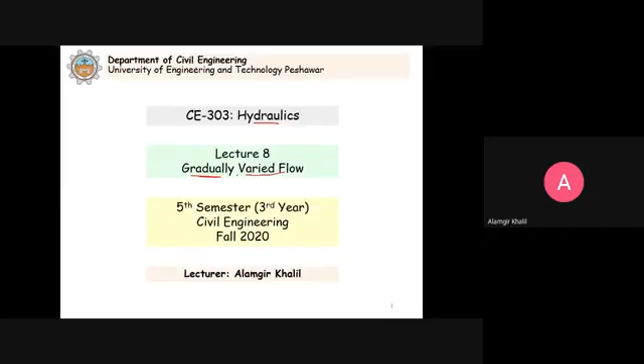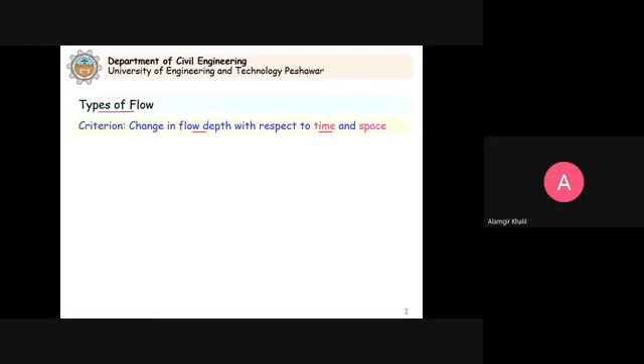The different types of flow that we have studied, the criteria being flow depth with respect to time and space. Open channel flow can be classified as steady flow, where the depth of water is constant with respect to time, not changing: partial y by partial t equals 0. If the depth is changing with respect to time, then we have unsteady flow. All the problems we discuss in this chapter are essentially steady flow problems, meaning the depth and discharge are not going to change with respect to time.

If we base the classification on space, that is with respect to distance, then open channel flow can be classified as uniform flow, where the depth is constant with respect to x, so the change in depth with respect to x is equal to 0. If the depth is changing with respect to x, then we call it non-uniform flow, or commonly in open channel hydraulics, varied flow.

So the flow is steady, and then it can be uniform flow or varied flow. The uniform flow we have already covered so far. This varied flow, when the depth is changing with respect to x, can be further classified into gradually varied flow and rapidly varied flow. In this lecture and the coming lecture, we will cover these two topics.

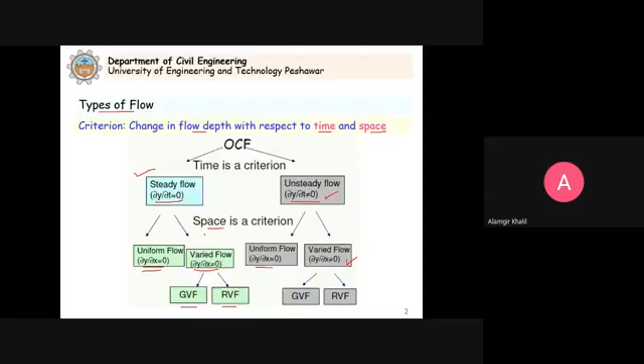Now, obstructions cause the flow depth to vary. When we have flow in an open channel, it will try to flow with one depth. If the flow conditions and channel cross sections do not change, essentially what will happen is that we will observe the flow in the open channel as uniform flow.

But in the flow there can be obstructions. For example, in this figure, the bottom of the channel is at one slope, but here the ground surface changes, and you can see the ground surface is now at this elevation or at this slope. So definitely we have to provide here a drop structure.

Similarly, for example, on rivers, we have to construct barrages, dams, weirs, and other hydraulic structures. Essentially what we are doing is bringing changes in the flow conditions, and generally we say that obstructions cause the flow depth to vary. So the flow will continue to be uniform flow as long as there are no changes.

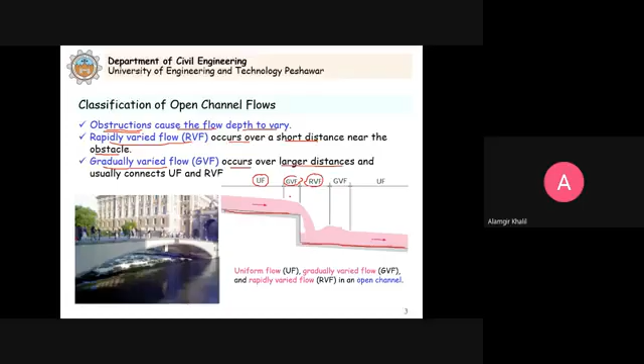So now essentially we should learn how we will analyze the open channel flows when we have varied conditions for the depth. So now we know that we have uniform flow. What is the reason for that? And what are the different types of flows that can occur with changing depth?

So in this figure again, you can see here that a gate is provided here. This is a gate to release a controlled supply of water, and these are all practical applications. So you can see here that just downstream of this gate, we are assuming that the depth varies abruptly. So this can be a rapidly varied flow. Then in the channel, a uniform flow will establish.

But you can see here that at the downstream, we have another hydraulic structure. This can be in the form of a weir, notch. So you can see here that we have the damming action. The water level rises upstream. And in this situation, you can see that there is a break in the water surface, which is shown by this curved or zigzag line.

Now downstream of this, we have this drop structure. And also you can see that the slope is changing. So when the slope changes, so you can see here again, the depth cannot be constant at all sections.

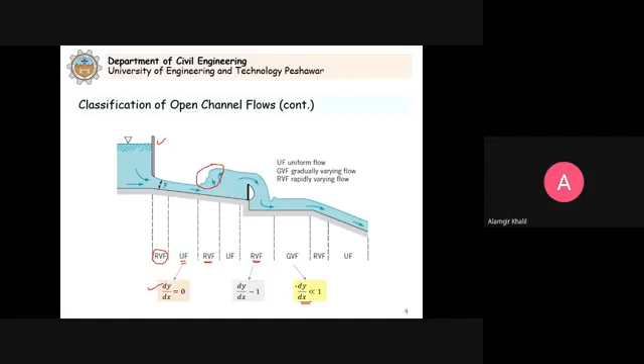If we compare this with the gradually varied flow, the change in depth with respect to distance is very small. It is changing, not equal to zero. For uniform flow it is zero, but here it is very small. When this condition is satisfied, we classify the varied flow as gradually varied flow. But as the change in depth increases, for rapidly varied flow, dy by dx is approximately 1.

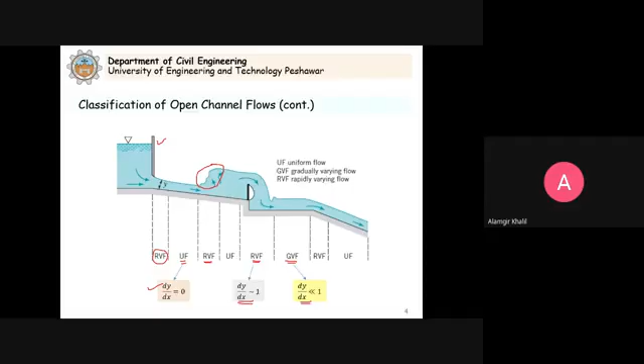Now, in today's lecture, we will cover the gradually varied flow problems. So why do we need to study gradually varied flow? You can see in this figure, we have a channel or a river or a stream.

So the water will flow with normal depth. And we defined earlier what is normal depth: it is the depth corresponding to the normal flow. And what is the normal flow? That is the uniform flow. Clear?

If we do not have any obstruction, this water will continue to flow with the normal depth, as shown by this dash line. So this water will continue to flow like this. Since now we have constructed a hydraulic structure in the form of a dam, we can call it a dam.

So what will happen is that the dam will store the water behind it, and this artificial lake created behind the dam, on the upstream side, we call it the reservoir. So because of this hydraulic structure, the water level has increased. Initially the water level was here, but now because of the dam, this water level has increased up to this level.

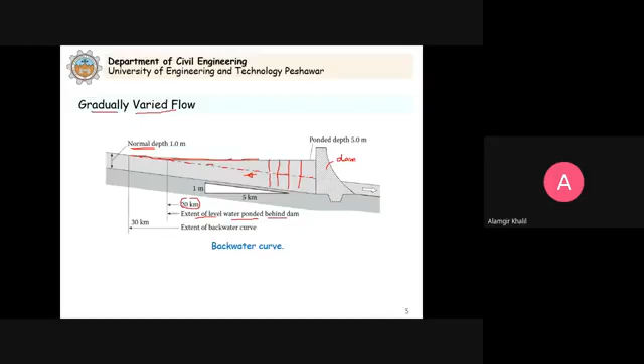And this curve which results here, the top surface curve, forms as a result of impounding this water. So this extension of the backwater curve is up to 30 kilometers upstream. It means that when we construct the dam, the effect of this curve, which we call the backwater curve, is generated because the water is backed up behind the dam, and the curve formed as a result of increasing the depth of water is the backwater curve.

So the effect of the backwater curve means that the increase in depth upstream has traveled 30 kilometers. This is not a short distance. Why are we interested to know about this?

Because the channel carries water at a certain depth, but because of the dam, the water level has increased. So what will be the problem? If this channel does not have sufficient capacity to carry the water, it will overflow.

For example, we have this channel here and the water flows in it. This is designed for uniform flow condition. But now as a result of the dam, the water level will rise. So if this channel has no capacity, this water will overflow its banks, it will overflow the sides.

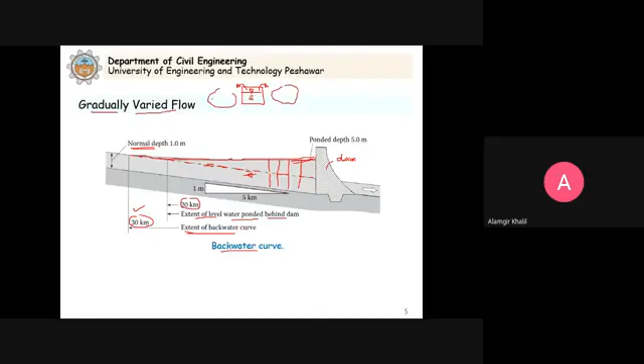And what will happen is that on this side, the communities will be flooded. So why is it important? This effect can be important for river engineers who wish to ensure that a river's embankments are high enough to contain flows, and for landowners along a river whose land may be flooded by the dam construction.

So we have to ensure that the river embankments are high enough to contain these flows. And for landowners along the river, those living along it, their land may be flooded because of this dam construction. And this actually happened.

In the case of the Tarbela Dam, the largest earth and rockfill dam in the world, when we constructed this dam, behind it we have a large reservoir and the water level increased. So several villages and people had to be relocated to other areas. So essentially this backwater curve, which results because of the construction of the dam, is essentially a problem of gradually varied flow.

This shows the importance of why we need to study the gradually varied flow topic. Now we know that this gradually varied flow is an important topic. Now we need to see how we develop the basic theory and then how we analyze the gradually varied flow problems.

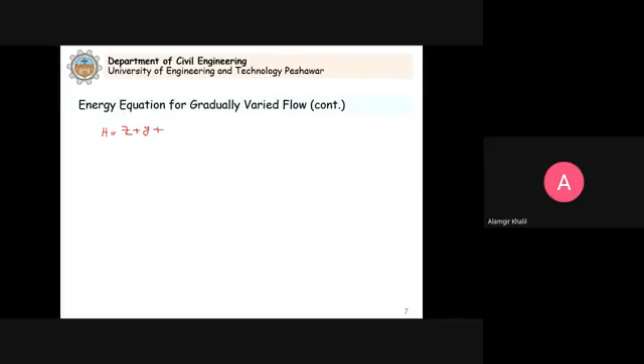So what we do is learn that the total energy can be written as H equal to Z plus Y. This is the potential energy head, because we are expressing energy per unit weight, so it is head. So we have Z plus the depth of flow Y, plus alpha V square by 2g, the kinetic energy head. Now in these problems, remember Z plus Y is the potential energy head above the arbitrary datum, and alpha V square by 2g is the kinetic energy head. This V is the mean velocity, the average velocity in the section.

Now, this alpha, the kinetic energy factor, is higher in open channels than in pipes. As you studied in chapter 8, it may range from 1.05 to 1.40 for open channels. And in case of a channel with obstruction, this alpha just upstream may be as high as 2, or even above 2.

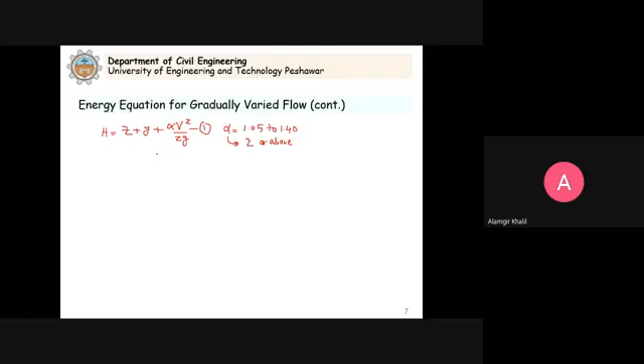Clear? Now this energy equation that we have written, let's say this is equation number 1. We will consider this energy equation for steady flow, because all the problems we study in this chapter are steady flow problems. Now between section 1 and 2, as you saw in the previous slide, we have section 1 and we have section 2.

That are delta x apart. What is the horizontal distance between that we consider? These are delta x apart, the two sections. It means the distance between the two is delta x. So now we can write down the energy equation.

What will that be? Z1 plus Y1 plus alpha 1 V1 square divided by 2G. This is equal to Z2 at the second section plus Y2 plus alpha 2 into V2 square divided by 2G, plus HF. We consider the head loss due to the friction. So let's say this is equation number 2.

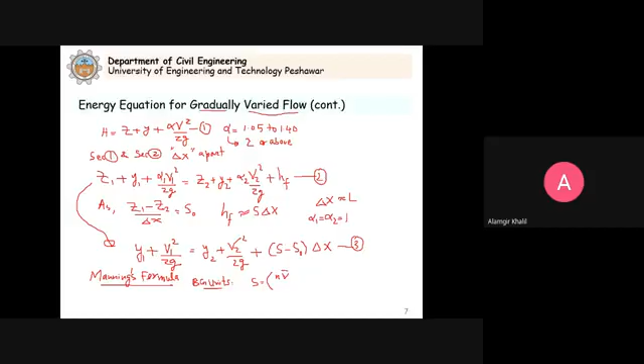In the British gravitational units, we can write down this formula for the slope of the energy line. If you simplify that, this S, the slope of the energy line, will be equal to the Manning's N, the Manning's roughness coefficient, with velocity V bar divided by 1.486 times the hydraulic radius bar to the power of 2/3, and because it is the slope we calculate, we take it as the square. This is in the British gravitational system.

When we consider the SI units, we drop this factor 1.486, and the rest of the formula remains the same. So S will be equal to N times V bar divided by the hydraulic radius bar to the power 2/3, this whole squared.

Now what we mean by V bar and RH bar: because we are considering average conditions, the velocity is not the same at the two sections. So V bar equals V1 plus V2 divided by 2. And this hydraulic radius RH bar equals RH1 plus RH2 divided by 2, since the depth and velocity are not the same at the two sections in varied flow. So we apply Manning's formula to average conditions in each reach to provide an estimate of the value of S.

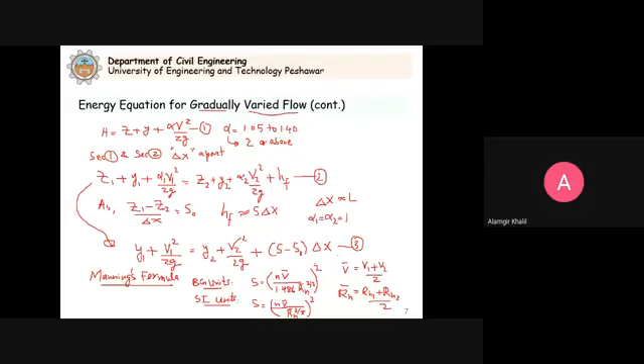Now with this value of S, with S naught and the Manning's N known, and with the depth and velocity at both ends of the reach known, we can compute this delta X. From that equation, delta X will be equal to Y1 plus V1 squared by 2G, minus Y2 plus V2 squared by 2G, this whole divided by S minus S naught.

We will need this equation towards the end of the analysis, this is very important. This will be equal to E1 minus E2, this is the specific energy, Y1 plus V1 squared by 2G. So E1 minus E2 divided by S minus S naught. This was equation number 3, and let's say this is equation number 4.

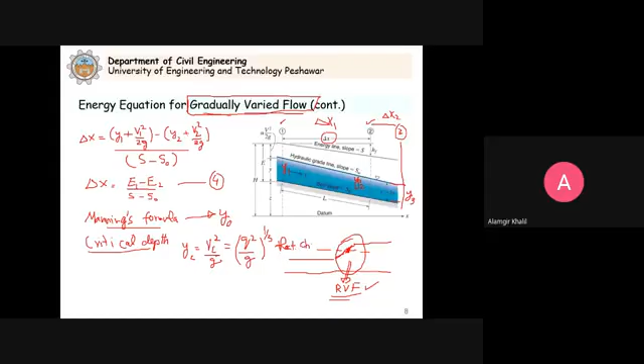You can easily calculate YC. Or if we have a non-rectangular channel, which we already studied, then you can calculate it from the formula for total discharge, which is also applicable to rectangular channels: Q square by G equal to A cube divided by the top width, and this is for Y equal to YC, the critical depth. So for non-rectangular channels you calculate the critical depth from this equation, and then you compare the depth ranges you consider in the problem against Y0 and YC, because we have to make sure that your depth ranges should not cross YC. If it crosses YC, it essentially becomes a problem of rapidly varied flow. Then we have to develop another theory for how to analyze rapidly varied flow problems, because it is no longer gradually varied flow. So this is important, how you write down the energy equation in case of gradually varied flow problems.

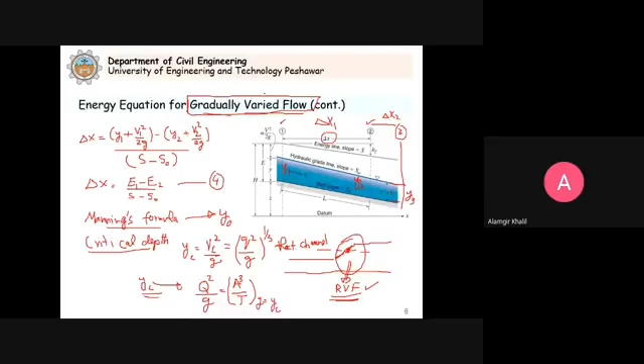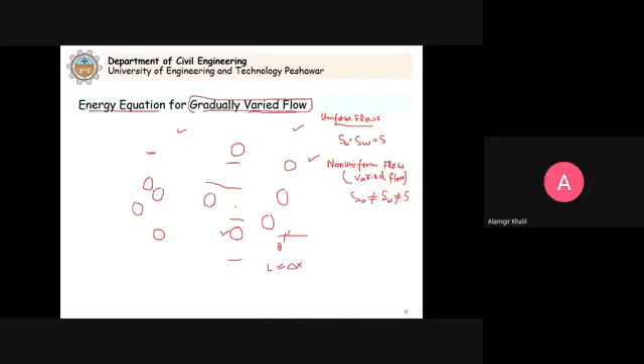Now, before we discuss how we analyze the water surface problems or water surface profiles in gradually varied flow, as you saw here, for example this backwater curve - so how do you analyze this water surface? Because this will tell you how much the water level is increased along this channel because of the construction of this dam. Ultimately, this is what we want to find out.

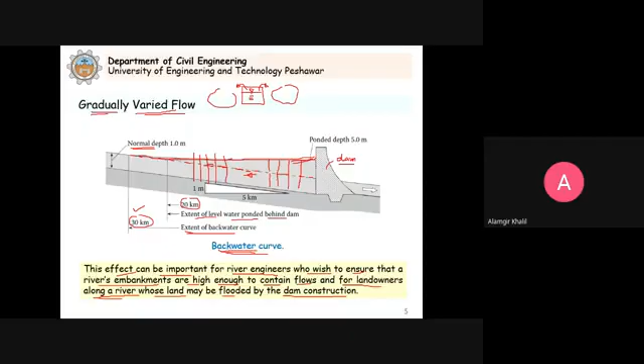So before we do that, we have to study the energy equation, and before that we need to classify the channels, because we have mild channels, steep channels, and critical channels where we have critical flow. So first we need to know the different types of channels or slopes, and then we can develop an equation to help us analyze the gradually varied flow problems. So first we study classification of channels for gradually varied flow problems.

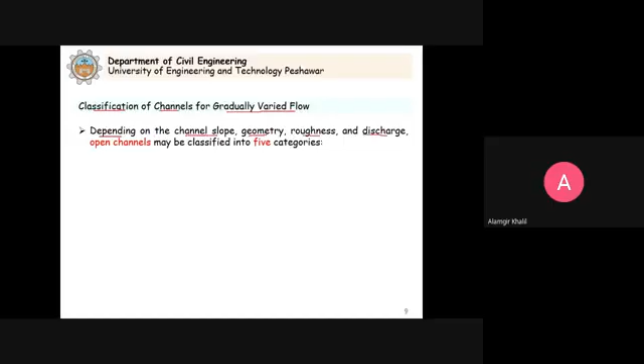Depending on the channel slope, geometry, roughness, and discharge, open channels may be classified into 5 categories. Open channels are classified as being mild, steep, critical, horizontal, and adverse in gradually varied flow studies. So we can classify open channels into 5 different categories when we consider gradually varied flow studies. We already know this - the behavior will be different, that's why we need to know this classification, and then accordingly we can analyze the gradually varied flow problem.

So we already know the mild channel, the steep channel, the critical channel. Horizontal is when the slope is 0, and adverse channel means the slope is negative, meaning it is increasing in the direction of flow. So let us study in detail these 5 types of channels or slopes.

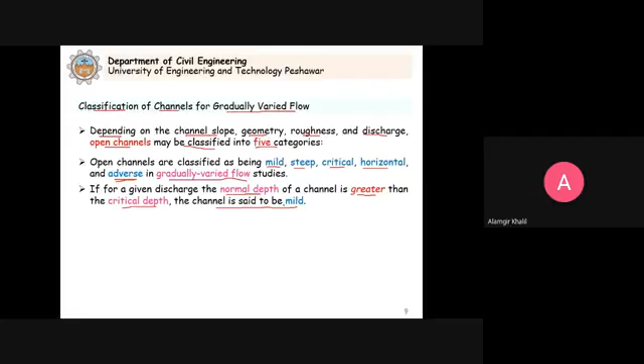If for a given discharge the normal depth of the channel is greater than the critical depth, the channel is said to be mild - we already know this. When the normal depth is greater than the critical depth, we say the channel has a mild slope. If the normal depth is less than the critical depth, the channel is steep - we already know this, we have studied so far. For a critical channel, the normal depth and the critical depth are equal. When Y0 is equal to YC, then we say we have critical flow.

So that is the critical channel, and the slope of the channel, that will be the critical slope.

If the bottom slope of a channel is 0, the channel is called a horizontal channel. It means that S0 will be equal to 0. We have a horizontal channel.

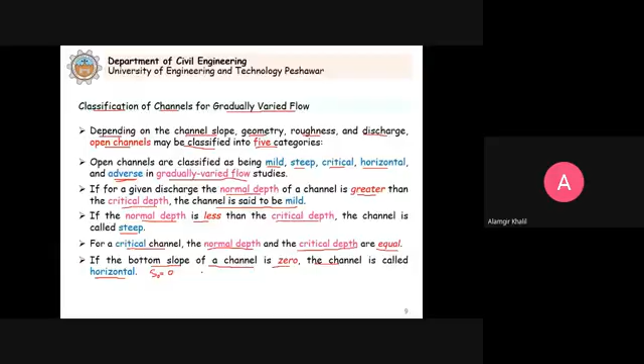A channel is said to have an adverse slope if the channel bottom rises in the flow direction. So in this case, we say that S naught is negative.

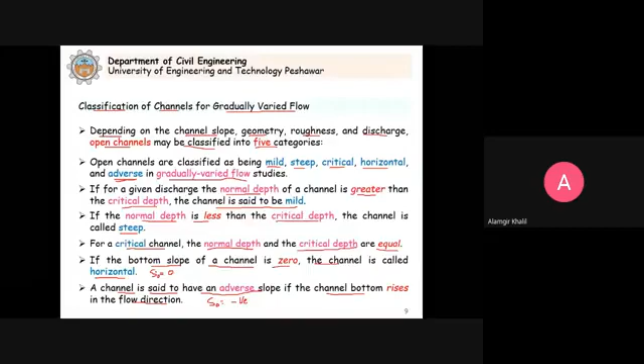S naught is negative. Now these 5 types of channels we need to understand, because we have gradually varied flow and these 5 possible types of channels, we need to understand because when the flow occurs, the behavior will be different. So when we analyze the problem, we need to understand these 5 types of channels. Now let us continue with this discussion.

So for mild channels, we say that Y naught is greater than YC. And when this is the situation, subcritical flow will occur at normal depth.

In steep channels, Y naught is less than YC, the normal depth, so supercritical flow occurs at normal depth.

When we have critical channels, Y naught is equal to YC, and we have critical flow at normal depth. We already studied this.

When we come to horizontal channels, it means that the bottom slope is equal to 0. It cannot sustain the normal flow. I will explain. Adverse channels, where S naught is less than 0, meaning negative, also cannot sustain the normal flow.

It means that these 2 channels are non-sustaining channels. Why? Because they cannot sustain normal flow. If you put S naught equal to 0 or S naught equal to negative in the Manning's formula, we cannot get the value for Y naught. That's why for these 2 channels, theoretically, Y naught is not defined.

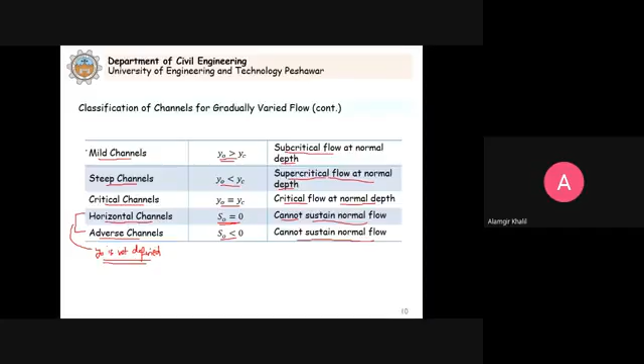It means that these channels cannot sustain Y naught; it is not defined. It means for this channel we cannot sustain Y naught. And the other three are known as sustaining channels, because we have Y naught here, we have Y naught here, we have Y naught here, but it is equal to YC. You can confirm this in the Manning's formula: just put S naught equal to 0 and S naught equal to negative.

So you will see that theoretically Y naught is not defined. Now the question is why it is not defined, because gravity is the main component for open channel flow. So if a channel is perfectly horizontal, it cannot sustain the flow. You need a slope of the channel for flow to occur. This is what we are saying, that the gravity component is the major driving force due to which flow occurs in open channels. So if the channel is perfectly horizontal, of course it cannot sustain the flow.

Similarly, if a channel has an adverse slope, it is increasing, so flow cannot occur. Flow cannot occur on a rising channel. That's why we say that these 2 channels cannot sustain normal flow.

But it is possible that a short segment of these channels can be encountered. For example, we can have a steep slope, then a small portion of horizontal slope, and then the water flows onto another slope. So there will be flow on this horizontal section, and then the flow can continue.

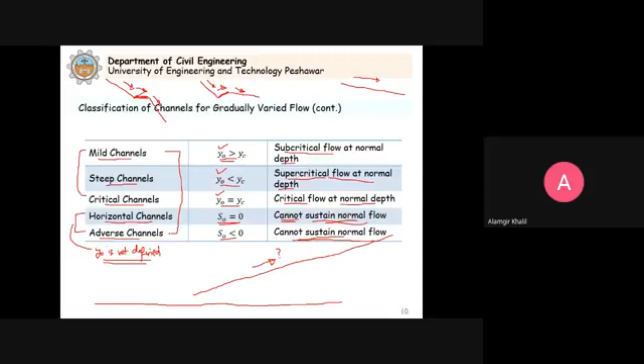Now in this case, this steep slope, we will denote by the letter S.

When we have the critical slope, we denote the water surface shape that occurs, and the water surface profiles that will occur, by capital C to differentiate from each other, just to write these short. If we have a mild slope, we designate it with M. When we have a horizontal slope, we designate it with H. And when we have adverse slope increasing in the direction of flow, meaning S naught is negative, we denote it by A. So these are the relative comparisons you can see for the different types of slopes that can exist for open channel flow.

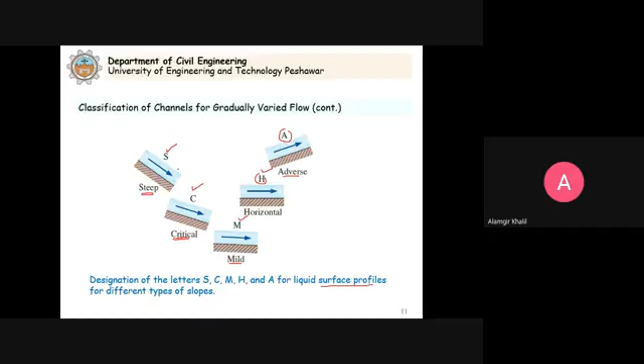Now we already know that for mild slope, S naught is less than SC. When we have steep slope, S naught is greater than SC, where SC is the critical slope. When we have critical slope, S naught is equal to SC. For horizontal slope, S naught is 0. And for adverse slope, S naught is negative. So this is a relative comparison where you can get the idea of how we define these 5 types of slopes.

Now when flow occurs over these channels, you cannot expect the same behavior. That's why we need to first understand these 5 types of slopes that exist for open channels.

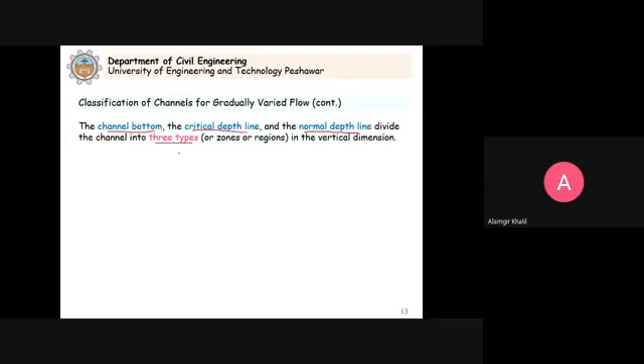Now the channel bottom, the critical depth line, and the normal depth line - these 3 together divide the channel into 3 types. We will call them types, following our textbook. If you study other books, they will call them zones or regions, meaning the same thing in the vertical dimension. So when we consider the channel bottom, the critical depth line, and the normal depth line, we can divide the flow in the channel into 3 types, zones, or regions in the vertical dimension.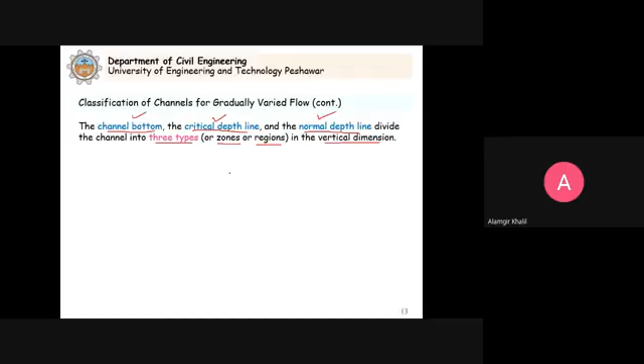What are these 3 zones? If the depth of water is above the two - one is the normal depth and one is the critical depth - if this is the depth of flow y, then we say it is type 1, zone 1, or region 1 flow. If the depth of flow in the channel is between the two - now we are not saying y naught should be above or yc should be above, no - between the two, whatever.

If the flow depth occurs between the two, we say it is type 2, zone 2, or region 2. And if the depth of flow is below the two, meaning the normal depth and the critical depth, then we say it is type 3, zone 3, or region 3.

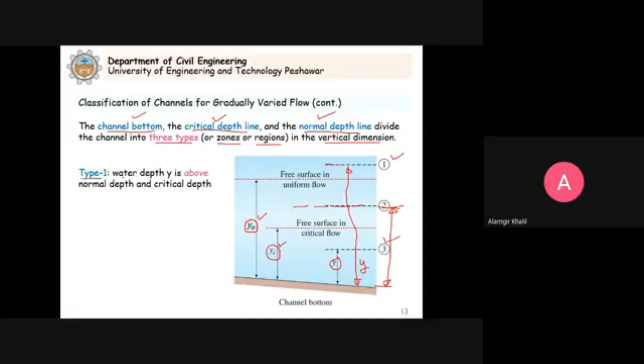So what I'm saying is type 1 is when water depth is above the normal depth and the critical depth. When we analyze the problem and find that y is more than the normal depth, which comes from Manning's formula or the Chezy formula, and also more than the critical depth we already discussed, we say it is type 1 flow.

If the depth is between the two - the normal depth and the critical depth - we say it is type 2 flow. Now we are not saying which one is above or below, no. We are just saying above the two, between the two, and below the two. If the water depth in the channel is below the two depths, normal depth and critical depth, that will be type 3.

We calculate these three in the problem. The y is the depth at which the flow occurs. It may not be y naught because we do not have uniform flow - y naught is for when we have uniform flow. So the flow may not be uniform, as we are discussing varied flow now. But we can calculate what the depth should be at which uniform flow will occur, and the critical depth can also be calculated, so we can compare the three.

If the depth of water in the open channel flow is above the two, it is type 1 flow. Now which one is above - y naught above yc or yc above y naught - this we are not saying. If the depth is above the two, type 1; between the two, type 2; below the two, type 3.

So it means we are not saying it has to be between yc above y naught or y naught above yc. No, we are just saying relatively: if the depth is above the two, it is type 1. If it is between the two, it is type 2. If it is below the two, it is type 3.

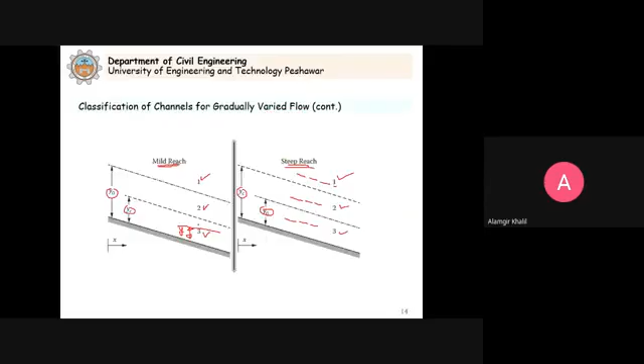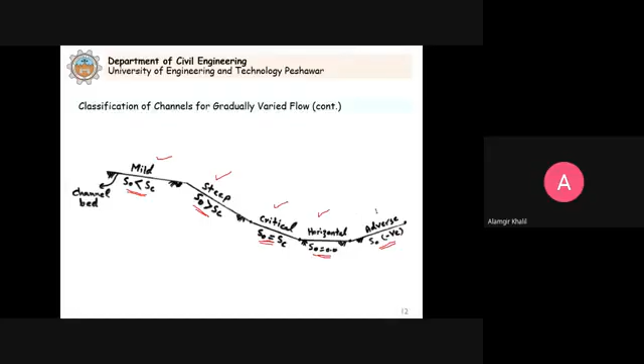So what we are saying here is that essentially we study 5 types of slopes in the channel. How many slopes did we study for our understanding? 5 types: mild slope, steep slope, critical slope, horizontal slope, adverse slope.

So now we have studied 5 types of slopes. For each slope, like mild slope or steep slope, 3 zones exist. We will call them types as per our textbook. So how many types exist? 3. So it means how many different types of water flows can occur?

Because the water surface can be here, here, or here, there are 3 possibilities for mild slope. The surface can be here, here, or here - 3 possibilities for steep slope. So it means we can have 5 multiplied by 3.

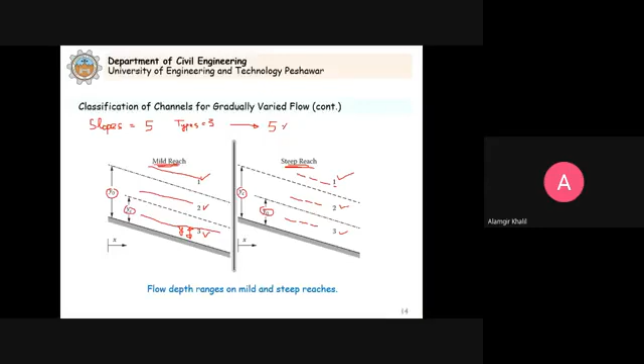It means 15 - so far 15 possible water surface flow, or water surface profiles rather, I will say. 15 are now possible. Clear?

Now the next question is that we can have 15 types of flow conditions that we have to analyze as the gradually varied flow problem. Now the next question is: are all these 15 water surface profiles possible?

Now the question is no, not all of them. Not all possible. Not all possible practically. Not all possible. Why? Let us answer this question.

Because when we consider the critical slope, when we have critical slope, what will happen is that y naught is equal to yc. So when y naught is equal to yc, it means there is no zone 2.

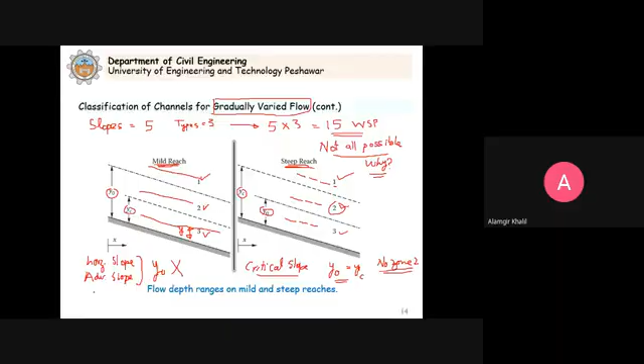So it means the depth can be above the critical depth, it is possible, and the depth can be below the critical depth. You understand? The depth can be above the critical depth and it can be below it. So it means the y naught for these two slopes, let me write down y naught - actually it is infinity. The normal depth y naught for these two is infinity.

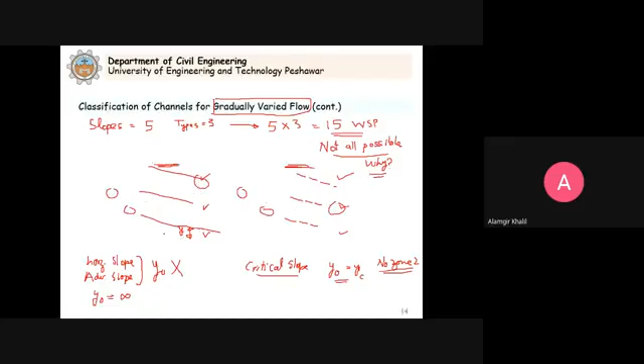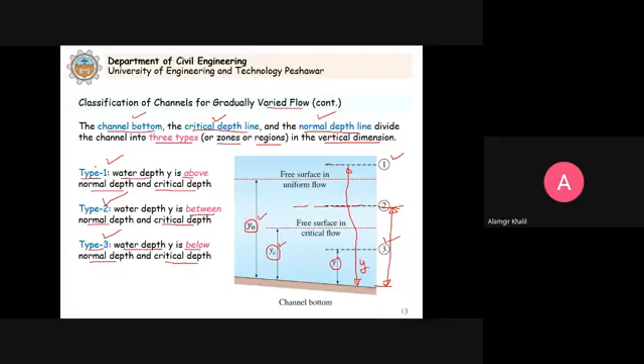Now for zone 1 to occur, the depth should be above the normal depth and the critical depth. That is zone 1, or type 1, or region 1. So it means for these two types of slopes, we have no zone 1, type 1, region 1, whatever you call it.

No zone 1 occurs. So zone 1 cannot occur for horizontal slope, zone 1 cannot occur for adverse slope, and zone 2 cannot occur for critical slope. That's why out of this 15 minus 3, we have 12 possible water surface profiles.

12 possible water surface profiles. So now in the problems, in the questions, 12 different types of possible water surface profiles can occur, and we need to analyze them. So how to do it, we will continue after the break.